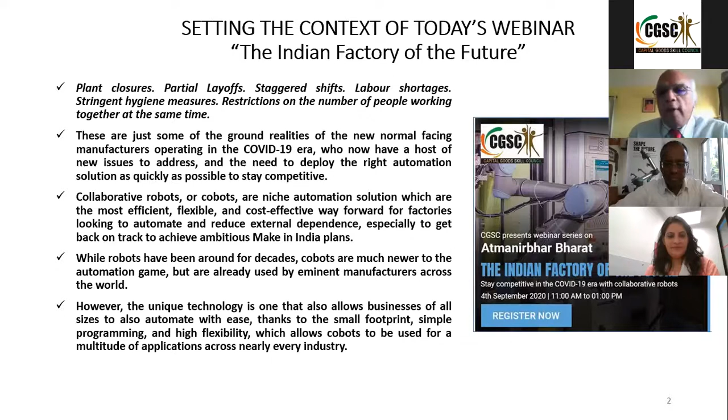Some of the ground realities of the new normal facing manufacturers operating in the COVID-19 era, who now have a host of new issues to address, and the need to deploy the right automation solution—I don't want to say low cost or high cost, but the right cost automation solution—as quickly as possible, to remain competitive and relevant to the market.

I take great pleasure in welcoming today's speaker, Mr. Pradeep David. He is a general manager for South Asia, including India, for Universal Robots. Universal Robots is a Denmark-based company and leading manufacturer of advanced, user-friendly, and lightweight collaborative robot arms, Cobots as we've already called them. He is a highly qualified expert in robotics and industrial automation, with a master's in robotics from Clemson University and an MBA from Marquette University, America.

With over 3 decades of experience, Pradeep has worked with Rockwell Automation in the United States, Singapore, as well as in India. In a short span of time, he has become a name to reckon with, setting up and heading the operations for the South Asian region for Universal Robots.

Before we go into the webinar, I would like to take around 10 minutes to introduce the host of this webinar, Capital Goods Skill Council, where I happen to be the convener of the Industry 4.0 Task Force, and also looking after the Atmanirbhar Bharat webinar series. What is the Capital Goods Sector Skill Council?

It is a council started by the Government of India through National Skill Development Corporation to define and develop national occupational standards, develop quality assurance parameters for assessments and certification of trainees, create programs for training the trainers and training the assessors, and accredit those people on an annual basis, promote academies of excellence for the sector.

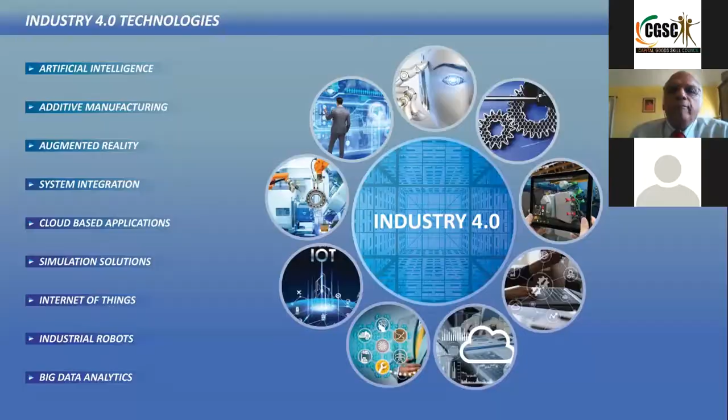Already some of these jobs are listed on Naukri.com, Indeed.com, etc. So please look for jobs in this area. They are highly paid jobs. At least for the next 10 years you can improve your salaries. Even during the COVID era, some of these jobs are very relevant because they are all driven by the internet and the cloud.

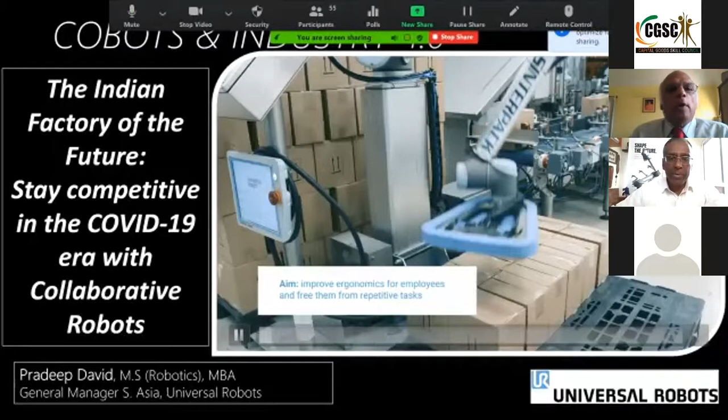So very quickly, I just want to ensure that the screen is visible. Can the video be seen? You're yet to share, sir. Yet to share, okay, hold on. I unshared, so you have to share. Got it, one second. Okay, yes sir, I can see your screen. Excellent, excellent. Now, okay, if you operate - yes, I can see your video also.

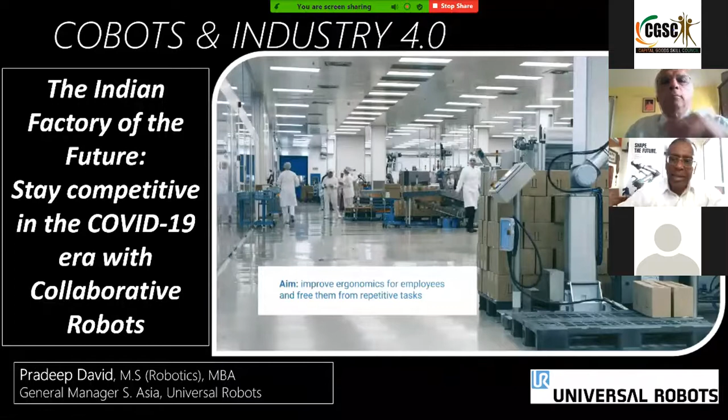Notice the elegance - just one simple pedestal, you mount it on it. There's no fencing around because it's safe to operate next to a human being. Unlike a robot, where robots have been known to kill people, right? We even heard of the accident in Manesar at the Maruti plant, where one of the robot technicians got pinned against the fencing and killed. This can't happen with cobots.

Collaborative robots are safe to operate alongside your operators. You can move them around. In this case, you can see it's just doing a palletizing application, picking boxes, placing them, right? So let's go on this journey of what a collaborative robot is, okay?

So since the COVID era, we do have to start with COVID-related stuff. So let's get that out of the way first. Here are cobots, collaborative robots, being used for various purposes in combating COVID.

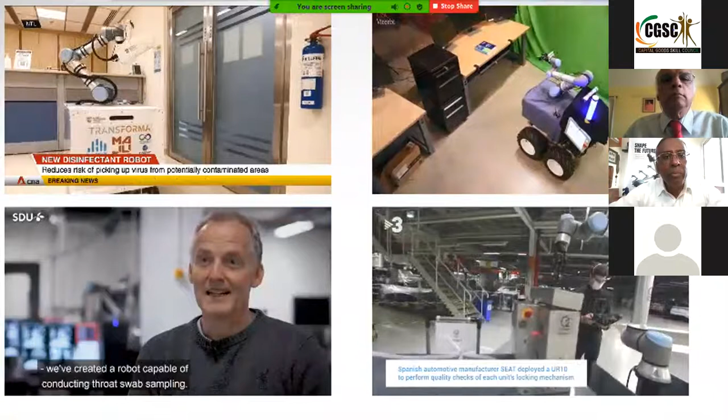On the top left, you see this is in the NTU University in Singapore, where a collaborative robot is mounted on a trolley kind of a thing, and it's dispensing fluid, cleaning the area where, let's say, there was an infection. On the top right, you see that maybe there was a finance person who was operating on this workstation and he got COVID, right? You don't want to send a person in there, so you put a cobot and it's got an ultraviolet wand and it's now sanitizing that location, okay?

So I like to say robots are known for the 3 D's - jobs that are dull, dirty, and dangerous, right? Dull jobs like this spraying. Dirty, where I could get infection. Dangerous, like in this case, for example, it's taking a throat swab of the person.

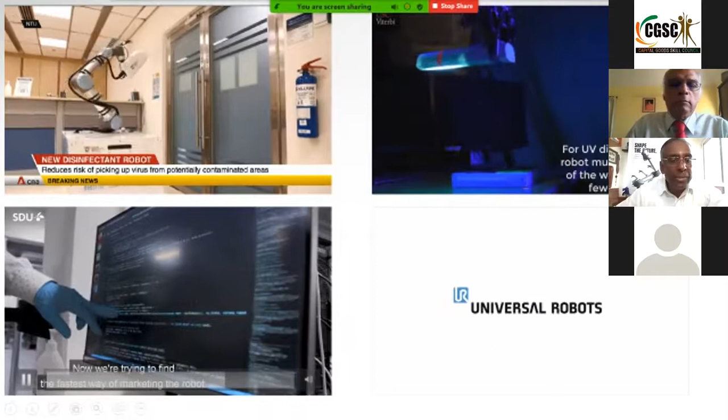So dull, dirty, dangerous is known for robots, but I add 2 more D's to it. Difficult jobs - so we have, for example, loading parts into a leak testing machine at our 2-wheeler companies in the country. Very difficult to do for an operator. A crankcase may have a very difficult shape, and to insert it into the leak testing machine and remove it for 8 hours a day is pretty difficult, okay?

So difficult jobs, and finally jobs where distancing is required. Today, you and I are in the COVID era, we have to abide by government laws, and the government says you need to have 6 feet distancing between people, right? Cobots automatically give you that distancing.

Bottom right, you see a cobot that was used in Spain at one of these automotive companies, I think it was Seat. And Spain had a lot of infections 2 months ago, so they repurposed the cobot, and it is now making respirators there. You can see the first respirators rolled out and everybody's applauding it.

So I hope you get the idea. When you buy a cobot, it's not like a robot that's fixed on one machine doing the same thing over and over again, right? It's really a tool that you can move around based on your requirement. You can even use it as a chef, let's say, to make dosas for you. We'll show you videos of that later on.

So it's that flexible - like you can see, I've got it running in my house. Just brought it in my car, hooked it up to the current, single phase power, programmed it, and it's up and running in a matter of minutes.

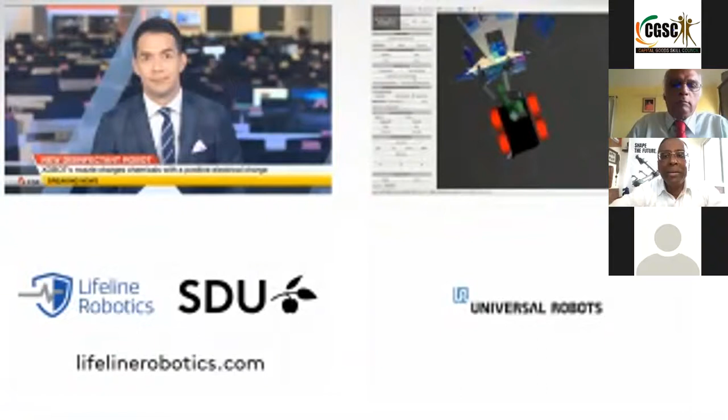So 4 main messages here. Number 1, I already talked about social distancing, right?

Now, women had one issue. They had to tighten 800 bolts a day, and their hands were getting tired, physically very demanding. So they put cobots in. Number 1, it gave them social distancing, 6 feet between people. Number 2, her job is now elevated. She's now able to do quality control instead of brute force work. And it also helps in women empowerment in this case.

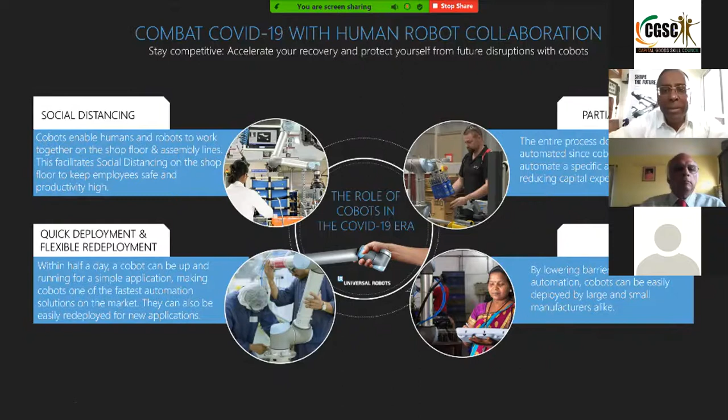So social distancing is one aspect, quick deployment and redeployment is another. Deployment is, I brought this cobot in my car, set it up - that's deployment. But what happens if this is a factory and I've got 20 CNC machines, and operator number 17 on machine 17 didn't show up today? He has COVID or some problem. Am I going to be dependent on that one absent operator and have my entire production line stall? No - I can take a cobot, hook it up on station number 17, and it can now be producing parts for me.

Exactly what you can see L'Oreal in Pune is doing. This was not a machine - this was actually an end-of-line palletizing system. They were able to relocate it from one shampoo line, where demand was low, and move it into another shampoo line in the same shift. Just remove 4 bolts, 2 people carry it and move it there, set it up, and it's ready to go.

So now I'm sure your brains are thinking, wow, with that I can show that my return on investment for a capital goods purchase like this can be very, very compelling. Because I'm not restricted to one application - I can use it in the night shift for one application and in the day shift for another application. So these are the benefits that you have with the cobot.

Democratized automation - I think Mr. Chandramouli pointed this out. We show out here a lady - notice she's not a robot programmer, she's just an operator that works in an SME in Pune. On her machine, we have put a cobot, so we've given her a teach pendant. And she says, 'Oh, I don't know how to do all this stuff.' We asked her, 'Do you know how to do WhatsApp on your phone?' Sure, she can do WhatsApp. Well, then you can also program a collaborative robot. And we showed her how to do that.

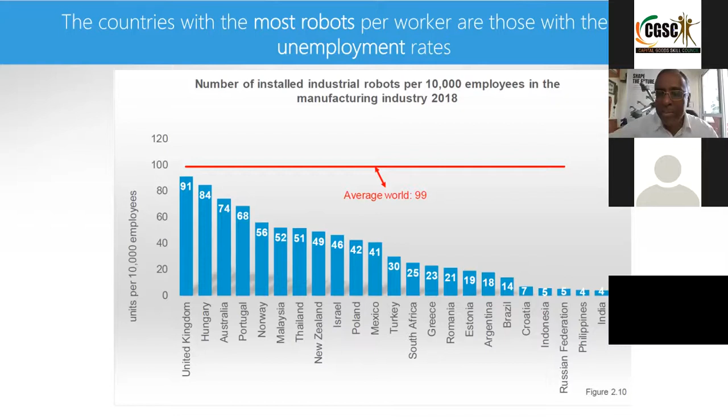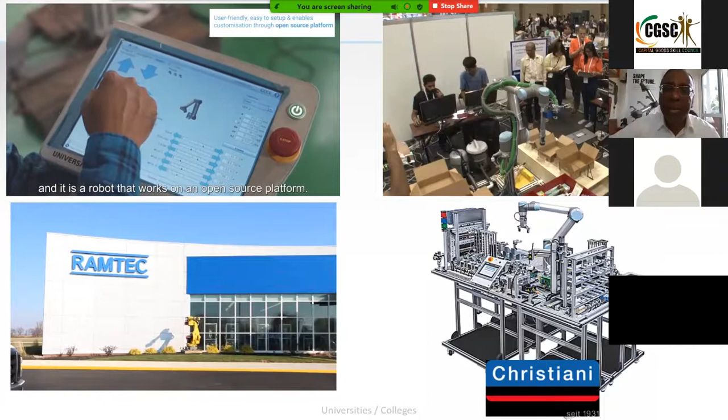This is the professor and head, Dr. Vinod, a good friend of mine, showing how he teaches his students to feel safe doing welding applications. They do a lot of welding there. In fact, they have a PhD program, a person who has done 30 years of welding at BHEL, and he has brought his expertise to PSG College, where they run PhD programs, etc.

You see a student programming it. Notice they're taking it from classroom to classroom on a trolley, so I can move it around from one classroom to the next classroom that needs it, or the next school, or if I've got an MSME presentation, I can use it. Fantastic for universities. Some government official is here too, also looking at cobots, thinking about how do we skill Tamil Nadu. He's coming to see what collaborative robots are doing.

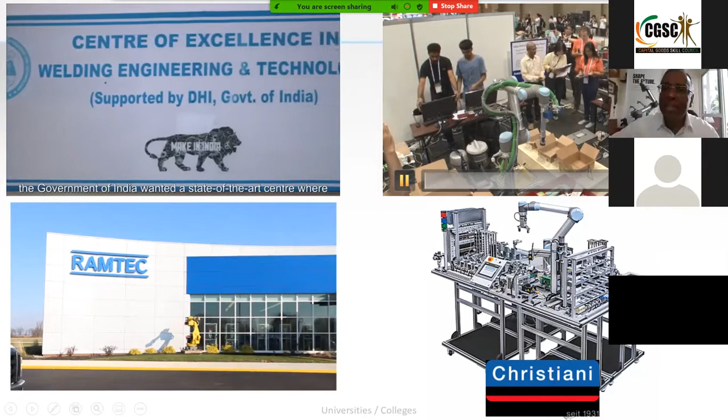On the top right, you see IIT Kanpur doing a pick challenge, an Amazon pick challenge. I don't know what's in this box, SAP gives me an order, I need to go pick up, let's say, a box of Cadbury's chocolates or a bar of Cadbury's chocolates. The robot gets the instruction. Here are the IIT Kanpur students who've programmed it with a vision system. It goes and finds the chocolate or whatever it is, picks it up with a suction gripper, in any orientation, and makes a decision to put it in box number 1, 2, or 3 for shipping.

So you can see while this girl on the left is being taught how to program very easily just by showing the cobot how to do things, the one on the right is being used with high-level programming, with ROS programming and Python programming. So yes, it can be very simple for my uneducated operator to operate, and yes, I can make it pretty complicated and use it to teach Python or ROS with low-level interface to the robots, like IIT Kanpur is doing.

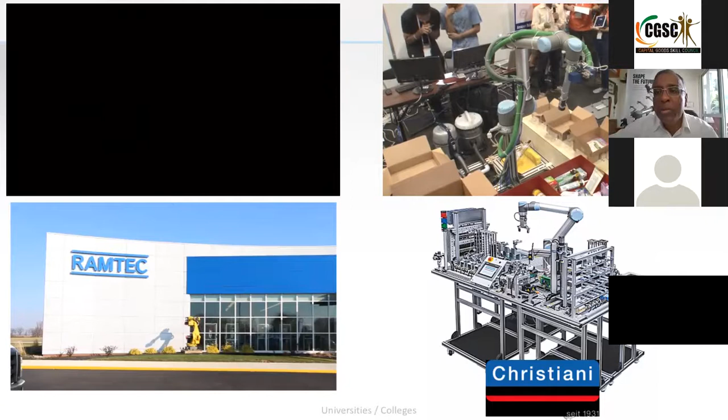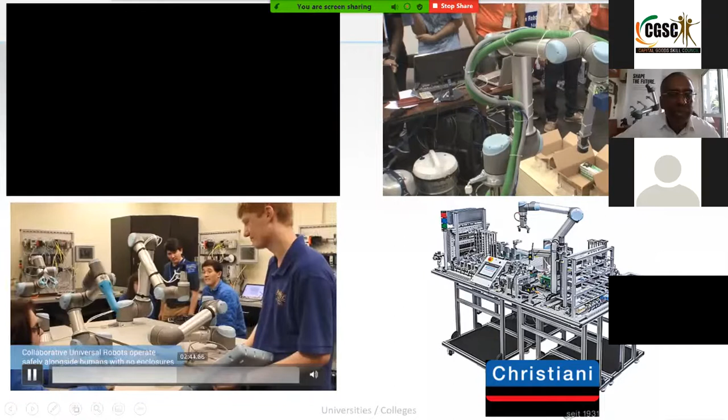Or here's a school in the US, RAMTEC, like a technical school. You can see people coming in for training on cobots. It's a proud legacy of automation, I think this is somewhere in the Chicago area. You can see the instructor teaching using simulation software, and by the way, the simulation software is free. So if you as a university are watching this and want to get started, go to our website, download it today and get started. There's nothing preventing you, there's no cost to getting started. This shows how they're teaching students very safely, multiple students sitting around multiple robots doing various projects, highly affordable.

And then to take it to the next level, Christiani is a company out of Germany, they do training systems. After all, Skill Council, Capital Goods Skill Council, you're not going to be training only on cobots. You're going to be training on Festo, you're going to be training on Siemens.

You're going to be training on pneumatic valves, on hydraulics. They've put a system with everything together, including a Cobot. So if you are in the training profession, if you are in universities, basically you can't do without something like this. You can do PhD programs with it, MSME outreach programs, teach it in your classrooms, move it from classroom to classroom. It's almost a no-brainer, and we have all kinds of customers all over India.

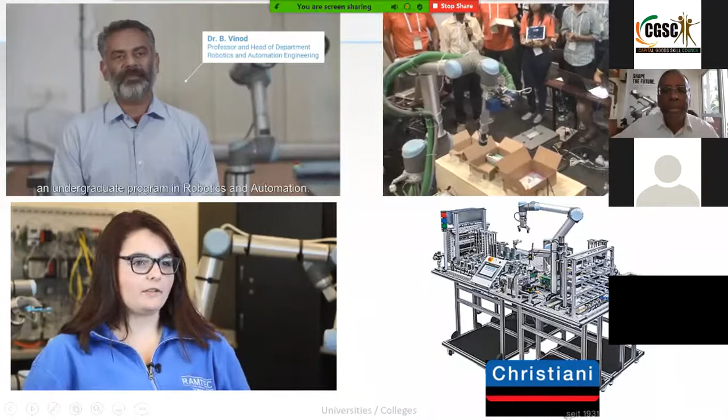I think my next slide shows a couple more universities, VIT in Vellore Institute of Technology on the left, and Manipal Institute, where my son goes, on the right. They've got the Cobot running. Mr. Chandramouli had mentioned that many universities will be attending, students, etc, so I thought I'd share this with you.

So highly affordable for universities. There is an educational discount which allows you to get started pretty easily. Come talk to us. We definitely are interested in skilling India, which means skilling our students, our people who are looking for jobs, getting them to the level where technology is going, the future of manufacturing in Indian factories.

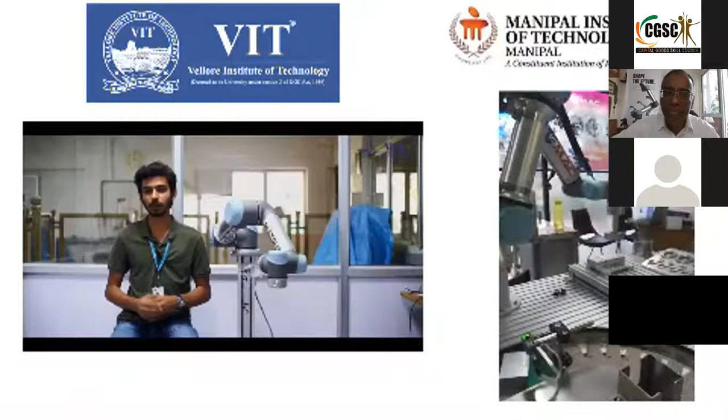Just so that it's not getting too one-sided, let me see, is there any question I can answer at this stage? Is there any question that's come in? Adya, maybe you can come in and tell me if there's any questions that have come in. Or Mr. Chandramouli. Yes, sir.

So one question was, what is the approximate cost of a robot? Fantastic, that's a good question. In fact, Mr. Chandramouli asked me yesterday the same thing. So to get started, basically a small robot, we have different sizes, right? A 3-kilogram robot, then there's a 5-kilogram, then there's a 10-kilogram, and then there's a 16.

So the 3 kg, which is the smallest, can start anywhere around 15 to 16 lakhs, brand new. Now for universities, we can work on something better because, similar to when you go to buy a car, they have demo cars, so we do have some things that we can look for more attractive pricing. But frankly it's not very expensive for the kind of work that you can do with this, starting at 15, but it can go anywhere up to 25 lakhs depending on what you want to do.

I want to put a camera on there, but let me explain a little bit more about what comes with it so that you can understand. There is nothing else you need to buy other than this system. It comes with the PLC, it comes with the IO, it comes with all the industry 4.0 connections, which means TCP/IP, Ethernet IP, Modbus TCP/IP, everything comes free of cost with it. Safety IO, and I'm sure I'm missing a bunch of other things, analog IO, digital IO, all that comes with the collaborative robot itself, a full control system, standalone.

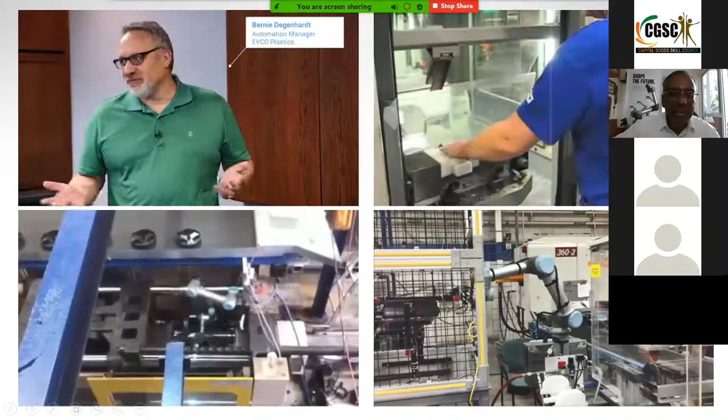You can see these are injection molding machines where the cobot is being used for a simple pick and place application. I'll let you view the injection molding machine—this is a robot mounted on top. You can see it's loading and unloading parts, and there's a conveyor going. So there was another question on whether cobots can be used for CNC machine tending.

The answer is yes, but the second part of the question is: how do we get it ready to operate, and what's the budget and operations idea? Good question—does it work with CNC machines, what would it cost, and how would it look? I think you've preceded me by two slides, so whoever asked that, give me a minute, I'm coming to that answer. It's in my slide.

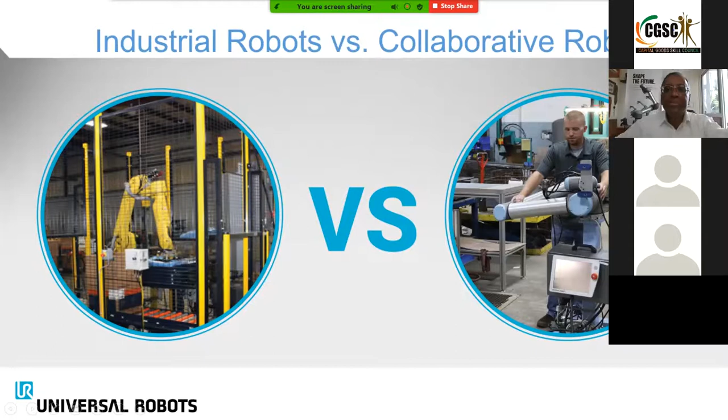Technically, there's a specification called ISO TS 15066. I won't bore you with this—if you're interested, just go to the internet and download it. This is the specification that ISO has come out with, which allows humans and robots to work together. It's a full one-day class to understand, so I won't spend too much time. There are many other certifications too, like TUV Nord.

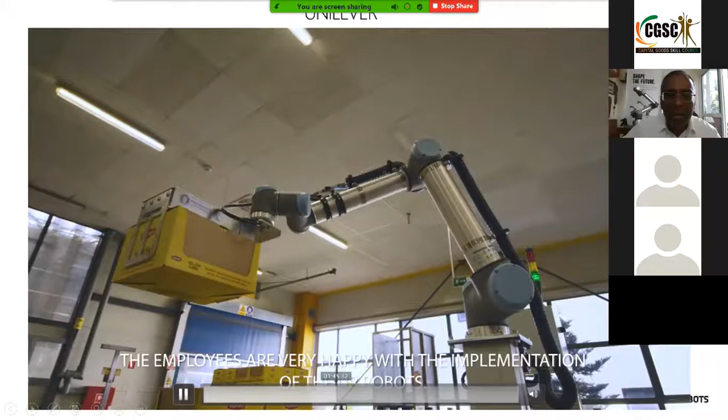Very, very simple. I think they bought six of them in this particular example. Let me show you—this is what the teach pendant looks like.

This is interesting—notice it's putting a box somewhere in a pallet. Now I want to program it. Let's say I've got an uneducated person who needs to program this. Take a look at what this guy does.

Notice the operator is holding the cobot by hand with the box, saying 'I want you to place it here,' then he hits the enter button and it remembers and repeats the motion. That's how much of a programmer you need to be. You can actually take unskilled labor with no education, show them how to hold the robot and move it to the location you want, and it will do that.

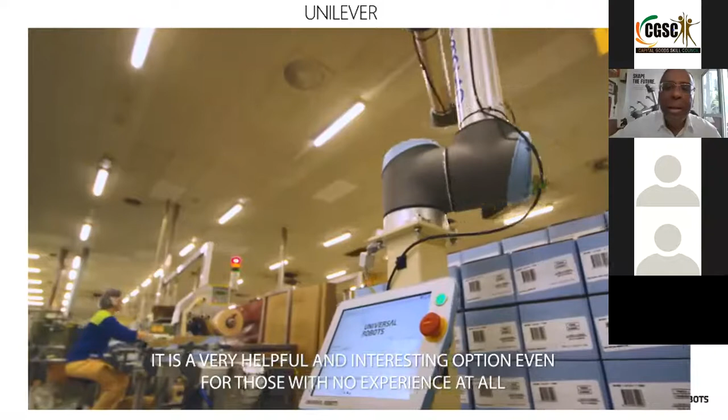That may look like no skills are required, but that's not true—because for higher value-add tasks, like the bin picking application IIT Kanpur did, you can't do it with that simple method of programming I just described.

Now you have to get into software. You have to get into Python programming. You have to get into ROS, which means robot operating system, wherein I send low-level commands to control every joint the way I want to. Okay, that can be done, but you need to be a bit of a programmer to do that.

So I hope you're getting the concept. While we say it's easy to program, to become an expert in this you really need to get some skills. You need Python programming skills, some PLC skills for interfacing signals, and some mechanical engineering skills, because how you design your gripper is very important. That can make or break your project.

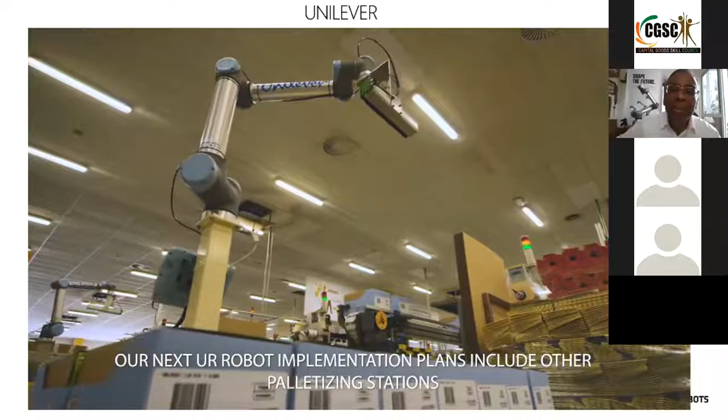Or in this case, he's got a camera sitting on top of the cobot. So how do I interface the camera to the robot? Now it becomes a little higher skill level. So I hope I made that clear. While I talk about low skills required to run it, you need really high skills to do efficient programming of a cobot. Now, the question that someone in the audience just asked, how do I do this on a CNC machine?

Let's take a look at a CNC machine project. This is happening all over India, where people say, I'm not able to fill my night shift, nobody wants to work at night. So they put a little input template, and the bar stock is loaded in these holes. The robot picks up the bar stock and does automatic gauging, the length check and diameter check and whatever else it needs to do.

It picks up the part and now it's waiting. Notice there are two grippers on the robot. Now it's waiting for the finished part, goes in, picks out the machined part, all automatic. Notice there's no human being around, and it loads, indexes and loads the bar stock, the raw material. It comes out, the door closes, it hits the start button automatically of the CNC machine and it's off and running. Now it deposits the machined part in the output tray.

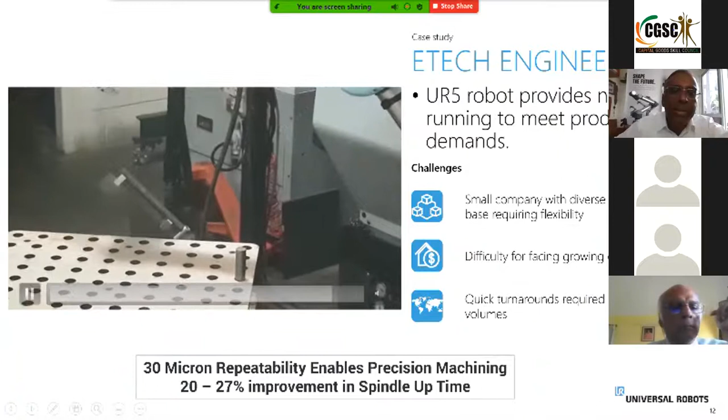Do you see how this can work for you? If you have a machine shop, just to get something like this inserted, we can probably come in two weeks and get this project done for you. Many of our distributors have a collaborative robot on their shelf, we just need to put a pedestal like this. You need to provide us some form of input, such that the input bar stock, maybe it's a conveyor belt, a gravity feed chute, whatever it is. In this case they put it in a little feeder system, let's say. So as long as you can give us the input and the output, where do I need to put it.

For us to do this job, by the time you place the order, get it in your system, and get it running, I guarantee you in two weeks we can have this running. So hopefully that answers your question of how long will it take.

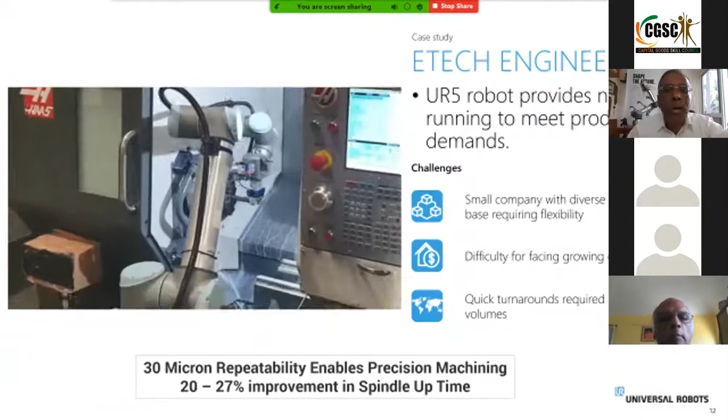Many SMEs have problems with payments. So these people are actually printing money because they could not run a third shift, and today they're getting production out of third shift. So if you need financial plans that you can pay out of the profits you're gaining by putting in a cobot, talk to us. We have connections with people like Siemens Finance that can help finance your project. So you actually see no cash down, no negative cash flow, and yet you're future-proofing your company.

I have SME customers, for example, doing this job for multinational company clients like Bosch. And Bosch has told them, look, if you do not automate your plant next year, don't expect me to increase your orders in any way. In fact, I'm going to start reducing. So there's a lot of pressure on SMEs to jump on the Industry 4.0 bandwagon.

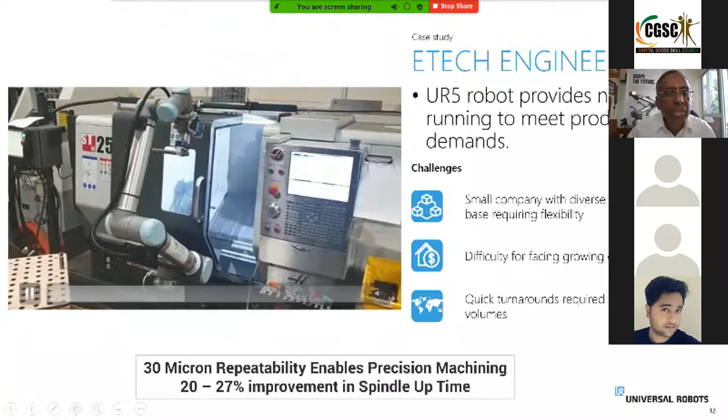So for a small investment like this, let's say 20 lakhs, you can put a UR5 cobot in there with some grippers, do a little jugaad to make sure I have an input and output tray, and I can show my client I've got a cobot. I'm Industry 4.0 compliant now. I've got much better quality and productivity. You want me to run through the night shift? I can do that.

So these are the benefits that are so powerful that I'm going to share some stories on how some SMEs have seen this value. And once again, it's not the cash, it's not the upfront cost that's going to deter you. It's, are you ready to start? That's the important thing. Are you willing to take the plunge to get started?

Let me give you an example of one company, a small SME, that has done this in Gujarat. Let's take a look at this video.

Oh sorry, I've turned the volume off.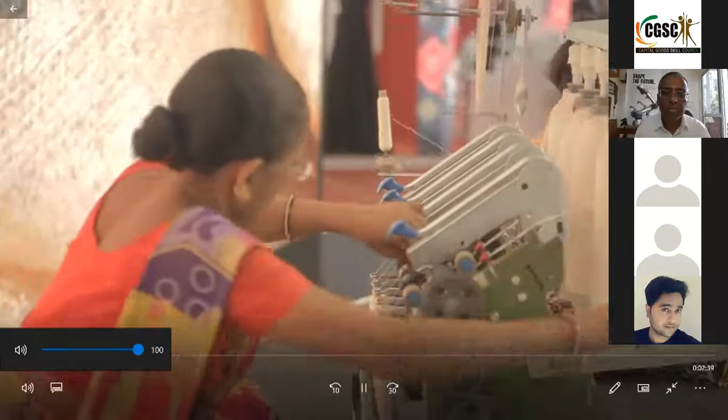I am Ashish Nagarshet, managing director with SMEW Textile Machinery Private Limited. We are a textile machine manufacturer based in Ahmedabad, India. SMEW was started in 1958 and it's been our family business since then. We make textile winding machines. Our main product is the soft package winding machine, the rewinding machine, and some customized machines for winding as well. We've gone from MSME to SME, a small and medium scale enterprise, from a micro scale enterprise.

In January 2017, SMEW Machinery decided to purchase and deploy the UR10 Cobot by Universal Robots. A universal robot with its simplicity and non-fencing requirement met our requirements specifically for this machine. The UR10 robot is basically being used for a pick and place application, so our operators find it very easy to use. It's on a different level as far as operator friendliness is concerned.

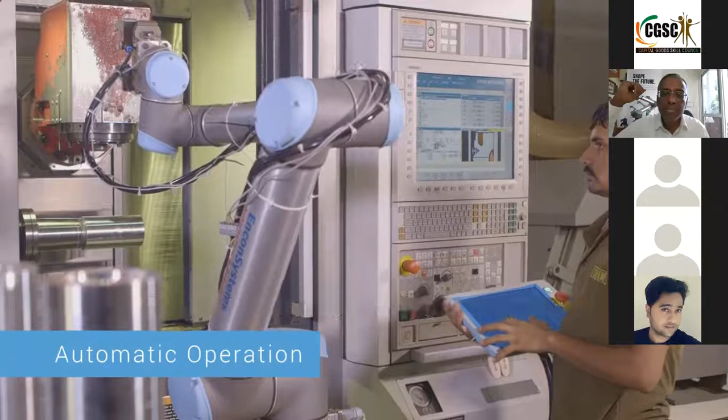The safety features were the most important part. The second important fact was the UR10 robot has a 360-degree movement in all directions, which a normal industrial robot would not have, and that was one of the reasons it could move in a very constrained space.

The advantage with this application for us is that we are able to run the machine for much longer hours than we would using human labor. Before the robot was installed, we were making about 30 pieces a week. Now we are able to go from 30 pieces to almost 80 to 90 pieces per week, a jump of almost 3 times. It's been very good for us because the return on investment is less than 12 months.

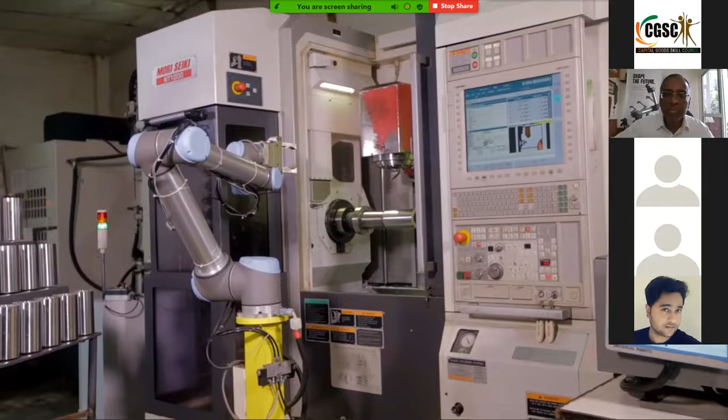We hope to have a long-term relationship with Universal Robots. We look forward to investing in more robots in the future and working along with the robots together. Just like Ashish at SMEW Machinery, many more small and medium-scale enterprises are choosing Universal Robots Cobots as an affordable solution to take their operations to the next big milestone.

I hope after this seminar we will have more satisfied MSME owners like Ashish.

Adya, any questions came in? Yes, I think Mr. Chandramouli is back, so he might ask you some. Okay, Mr. Chandramouli, any questions that you feel would be appropriate at this time?

Maybe he dropped again, but one question was: are cobots only suitable for pick and place applications, or are there other applications? Specifically about welding, if they're suitable for welding. Good, both of those are addressed - very good questions about what other applications, like welding, they can do. Please hold on for a few slides because I've got a slide addressing exactly that, I'll come to that in just a minute.

Good question. Yeah, actually, can you hear me? Yes, Mr. Chandramouli, go ahead. No, I'm Chaitanya here, I'm not Chandramouli. Okay yes yes, and you're from CommScope, Goa.

Is your cobot having 6 axis or anything less than that? All 6 axis - I'm sorry, I didn't clarify that. These are only 6 axis robots, basically articulated arms are what we call them, and yes it comes with 6 axes only. There's no 4-axis or 2-axis or 3-axis.

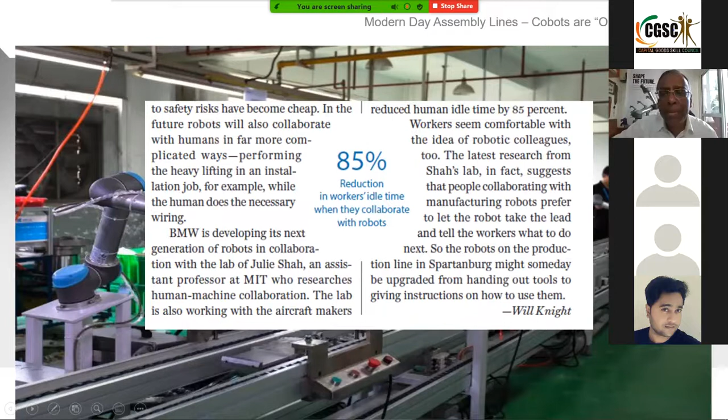Automatic social distancing—there's more than 6 feet between these two guys, no problem with COVID. But that's not the reason they put it in. The reason they put the Cobot and a human together in an assembly line is there's an MIT study, Massachusetts Institute of Technology, which specifies that when humans and robots work together, there's an 85% reduction in idle time. That's a huge, massive reduction, which consequently increases your productivity and quality.

Again, we have documented that very diligently. But like I said, this is not a marketing spiel, this is a study done by MIT. This is an example of a company making this, called Xiamen Runner.

I'll turn off the volume because some of it's in Chinese. They make these faucets and different things for your bathroom, taps and fixtures and those kinds of things. A lot of assembly—you have to put washers, put a handle, screw things together, shower caps, all that.

You can see the complex application Cobots are used for in assembly, where you have many little parts to be put together. Typically in an assembly line, I have people working shoulder to shoulder, and that's a huge problem today with COVID—I have to put 6 feet distance between them.

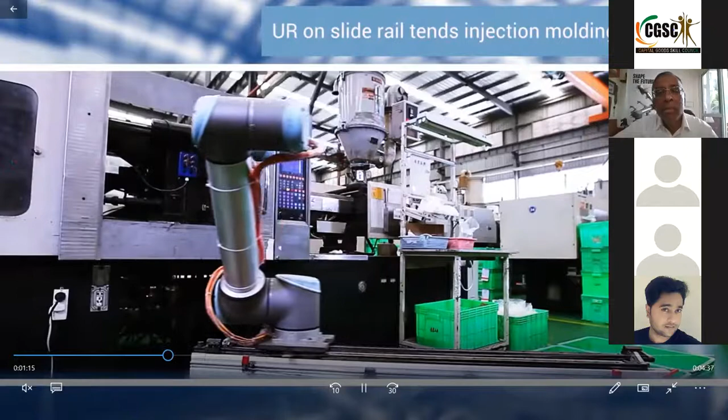So this is where a Cobot is extremely beneficial. Not only does it give you social distancing, it also acts like a pace setter. If the operator goes for a coffee break or a chai break and his input buffer starts building up, his supervisor is going to be on his tail pretty soon—hey, what's going on here, the robot's doing its job, you're not doing yours, and you're holding up the line.

This is what helps with idle time reduction and productivity improvement. So hopefully you're seeing what's on the screen—you can see it's a complex assembly part, being assembled completely by Cobots, taking it out from a machine, with human and robot working together.

Here it's taking it out of a machine and then taking it for a different application. The human being is doing something there. What I talked about—partial automation, humans and robots working together.

Okay, I'll take you a little forward here. It's dropping the faucet handle. I'll just go a little forward and you can see now.

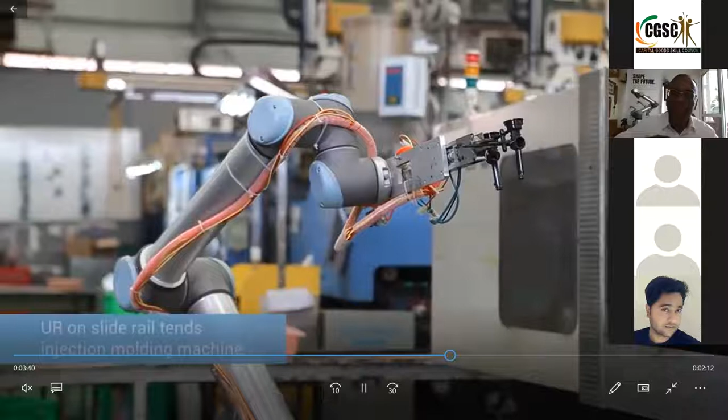Notice it's on a 7th axis. So while the machines may be far away, I'm moving the Cobot in real time from machine to machine, just by putting a slide in between. These people didn't want to change the layout of their factory, so they said, I can't put two machines close together because of the robot, but I'll put a slide like this and it can handle this machine and that machine.

So that's an example. Here's an example of how he's putting parts, and the robot is taking the parts from the turntable and loading it into the furnace there.

Okay, now you can see here, this is not a robot programmer. He's just an operator, and he is now moving a robot, putting 4 bolts in position. This company bought 60 collaborative robots in one shot to do this assembly application. This is how they can turn out millions of faucets and be very competitive. By the way, they've not lost any labor for that, they've actually doubled and tripled the size of their factory because of this.

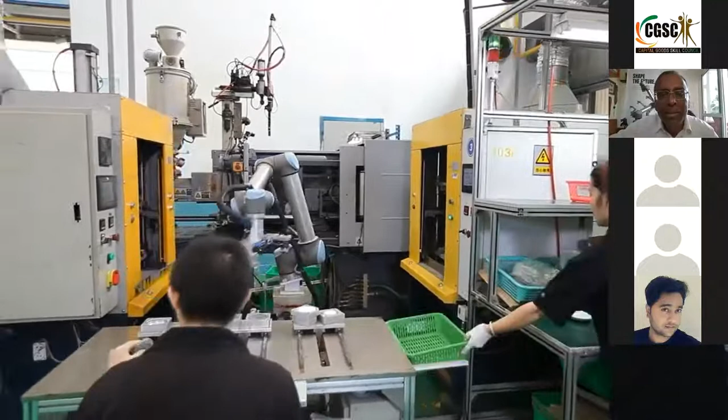Notice now, if the robot accidentally hits the operator, it doesn't kill him, it just stops. In Chinese it's saying here, protective stop, and you just hit restart and it starts from that location. It's just demonstrating how safe a collaborative robot is to work with your operator, so you don't need to worry about their safety.

Every axis is designed from the ground up to be very... notice how he's programming it by moving it to a location and saying, I need you to pick up a part from here. Now he's filling up there, it's coming and hitting him by accident and stops. He just hits the reset button here and it starts from that same location. All right, so that was assembly.

Hopefully that's answering some of your questions, what all can cobots do. I think I've talked about this, it's very easy to maintain, you can self-maintain it. There's no oil to change, no grease to change. It's easy to program, unless you get into the high-level programming, which requires Python code and skill set development.

Every axis will move plus or minus 360 degrees. You can move it from machine to machine. I can mount it on the ceiling, I can mount it on the machine, I can mount it on a pedestal. Very low power consumption, etc.

And by the way, it's not easy - that's why it was only introduced in 2016, this ISO standard which allows robots and humans to work together. There's 65 patents built into this for a human being and a robot to work safely together. And by the way, we've deployed 46,000 of these cobots now around the world.

And here are some examples you can see of what applications cobots are doing. On one page, I can see it's doing screw driving. On the top left, you notice it's the Bajaj Pulsar bike. I don't know if you saw it at the back, those bikes are standing there, the Kawasaki or whatever, Pulsar anyway. It's doing the screw driving application, automatic screw driving.

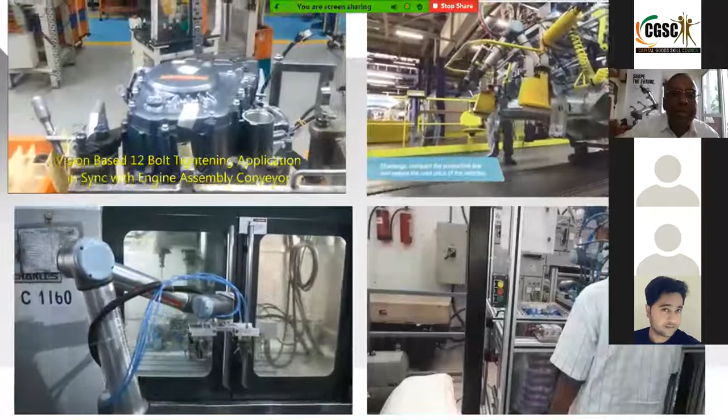Here also it's doing nut running. There's a camera, it's looking at the engine block and saying, oh, it's got 12 bolts. Now it's taking the nut runner and tightening that bolt, and the Newton meters is exactly right. The nut runner is then feeding it back to an SAP system against the VIN number of that chassis, of that engine, and your quality is therefore maintained.

Once again, 6 feet distance between this girl here and the girl on the left, or more - automatic social distancing provided by cobots. Also helped with Mr. Rahul Bajaj's vision of 50% women on his shop floor.

Top right, I can see this is in France, Peugeot. Notice the cobot is mounted and goes under the belly of the car and it's doing the nut running. It's a very difficult operation - a human being had to be under the ground for 8 hours a day. Very simply, he's put a cobot in there and it's doing the job. You can see here, it's a patented application by them, by the way, and there you go, it's doing the nut running.

Bottom left, we've talked about Bajaj, we've talked about Peugeot. Now you can see an MSME on the left - look at his shop floor, looks like any MSME, right, because it's in some Chakan, some industrial park. He's got 10 machines and he's got a cobot there. So he had to make a decision: do I want to put another machine, a CNC machine, or do I put a cobot?

He says, well, my problem is not machines, my problem is labor. I'm going to put a cobot in such that whether labor comes or not, I'm able to make my parts, maintain the quality that the customer requires, and maintain my productivity. So here's a machine shop owner that has made that decision of putting cobots in - he's only got 10 machines, but he's put a cobot in.

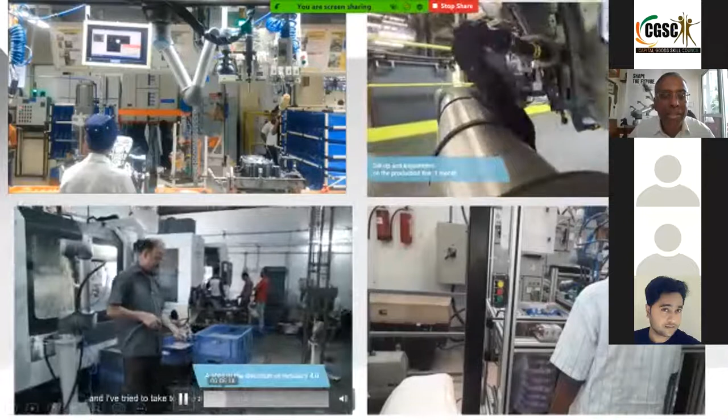Bottom right, this is in Chennai, Udayam Dal. They make dal packets. This lady used to carry these dal packets and put them in a sack. Today the robot is doing the heavy lifting. All she's doing now is dragging out the sack ready for shipment, and she puts in a new plastic bag. Very safe to operate next to it. In case it accidentally hits her, it just stops, no harm done.

So like I said, this is not a big company like Unilever. This is a small dal company, Udayam Dal. Notice the background, it's just an SME. So if you're an SME, understand you can afford this technology. There are ways you can finance this. It's only the desire to get started - yes, I want to get on the Industry 4.0 bandwagon, I want to have the latest technology, 50 disruptive technologies. We call it the big equalizer. So you could be a Bajaj or a Tata, or you could be an SME - cobots are for you.

And here's more examples of SMEs - New Engineering Works. This guy makes aircraft parts in Pune. This guy is doing some kind of painting applications. So you can see a quick video on that.

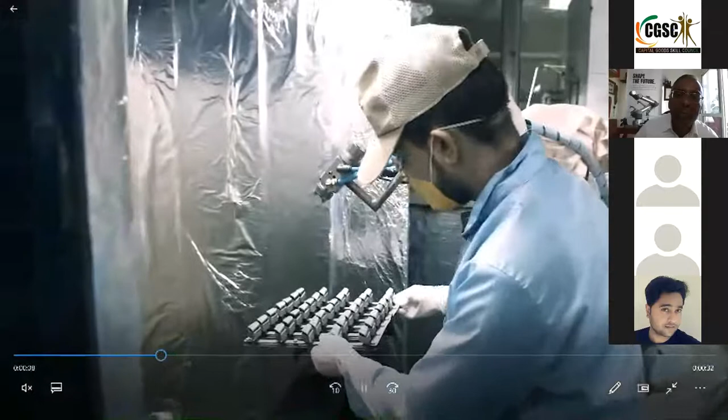He used to do the painting, and the quality was very bad when it was done manually, because you have to do exactly 8 coats of paint. Today the painter himself is training the cobot how to paint - he's not a robot programmer. Now the cobot will start, it needs to do 8 coats, and it can count exactly to 8. What the manual operator was doing on the left-hand side, it could be 8, it could be 10, it could be 6 coats, because after 6 or 8 hours he's tired. He's a human being, he gets a phone call and gets distracted, and that gets rejected because of the quality - the laser etching doesn't happen properly.

So he's talking about this, the SME owner - maybe you can listen to him. He talks about how difficult it is to get labor that's reliable.

I put this universal robot into production, it's hardly 2 months, and what we have observed is we are getting a better quality product. The rate of rejections or rework have reduced drastically, and furthermore we intend to increase the productivity also. What we were doing, let's say X quantity previously with manual interface, now we are doing X plus 2 with the robot even running at 50% of the speed. So in a couple of months time we'll increase the speed, and then of course we'll go almost 1.5 times what we were getting previously with the human interface.

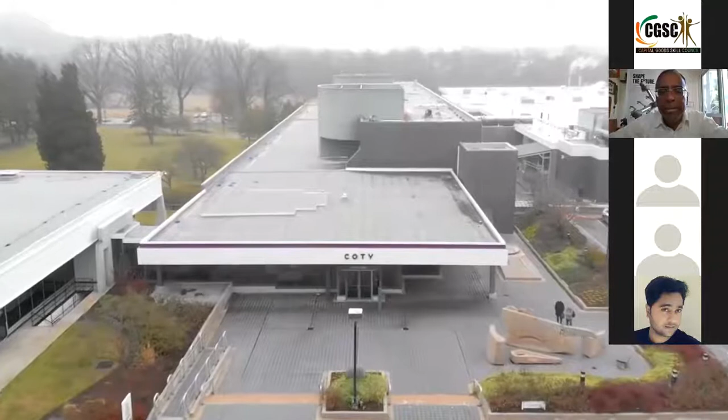They make nail polish and those kind of things, Coty. And they have about 12 presses that they had to handle, so they would have had to buy 24 robots for this. But instead, they bought 4 robots.

These 2 robots, UR3 and UR5, are on a cart. They move the cart to the location that it's needed, onto the press, and then it's working. Based on demand, I can move my cobots to where it's needed. So job shops which don't have continuous production get a lot of benefit from this. Today I got a big order there, I deploy my cobots there. Day after, the order's in the other building, I can just take the cobots and deploy them at the other building. You can never do that with robots, but cobots allow you to do this.

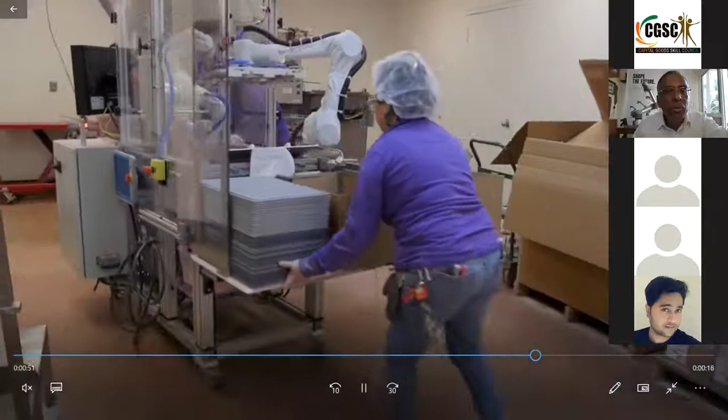Once again, you'll see here in a minute. They bring the cart to the machine with the 2 robots on it, the UR3 and the UR5, a 3 kg robot and a 5 kg robot. Then they locate the cart on the ground, there's the locating pin. Once they put the locating pin, it goes about doing what it has to do.

He's talking about how he could never have afforded this project. This is the engineer who did the job. Trust me, all he's saying is that he could not afford this project, but since he can move the robots around, it became affordable and he did the project.

The plant manager is very happy with this. There are 10 Dell plants around the world, and what he has done in Chennai, people are replicating. It's a very proud thing that somebody is doing it in India and they're replicating it.

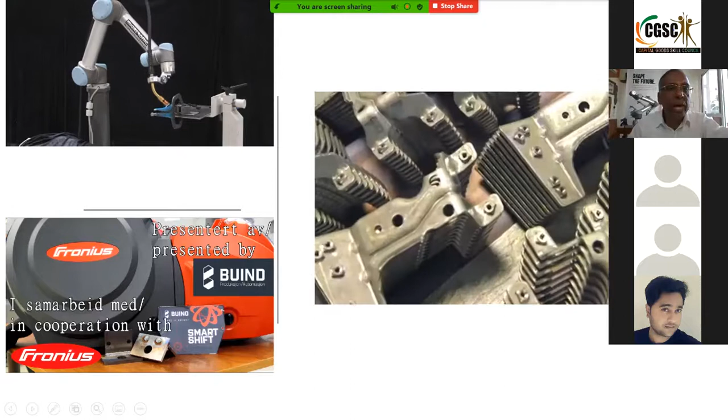On the top left is an arc welding example, how the Cobot is being used for arc welding by one of our partners, Megatronic.

Bottom left, this is with Fronius. We're actually doing some kind of an assembly application. So let's say you needed to do assembly and welding of parts right through the night, unattended.

Notice a tool is being changed. The part is now being picked up, whatever that part is. And then maybe the assembly requires screwing and drilling in one location and welding in another. So it's taking the part, putting it in a fixture where a certain application is happening.

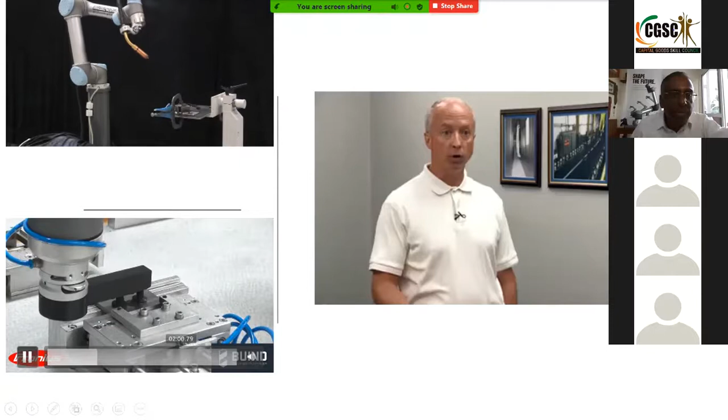Now it's taking another part with a suction gripper, putting it in the other fixture, clamping, and then now it will go change its tooling and pick up the Fronius, the welding gun.

So MIG welding, TIG welding, resistance welding is another common one. Bottom right, you can see Universal Robots does a 40% efficiency increase in welding application. This is resistive welding that they're doing on the right-hand side.

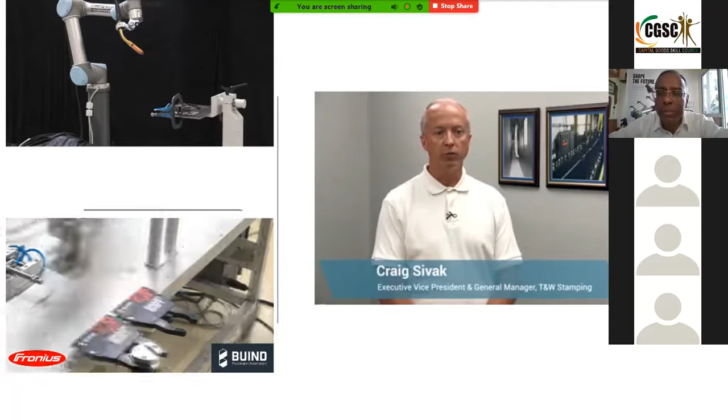If you're interested in this, there are about 100 videos on welding. Just type in Universal Robots welding on YouTube and the videos will show up. All these videos I'm showing are available in the public domain - just type in Universal Robots SME in India, let's say, and you'll find it on YouTube. So that's resistive welding on the top right - different types of welding, and there are many, many more.

So CNC machine tending - here's an example. Now I know Mr. Chandramouli is very fond of Fanuc, so I'm showing some robo drill machines here, where the cycle time is very low, and a collaborative robot has been put on rails, and it is actually loading and unloading maybe 16 machines or 8 machines per row. Just one cobot is doing the loading and unloading of the entire line.

There are different types of many examples of machine tending that I've got, but in the interest of time, I'm just going to move on. And I want to show you this video.

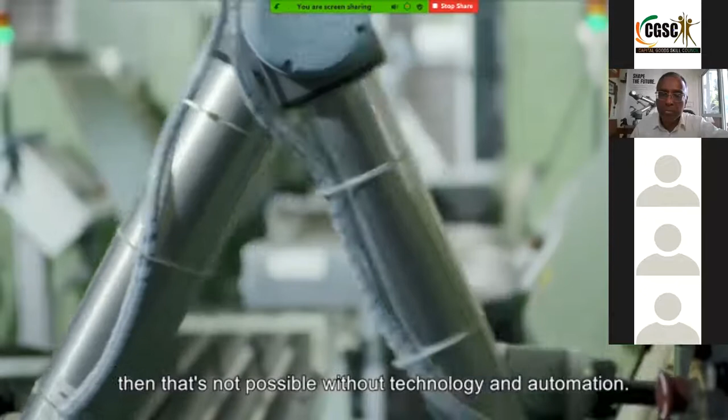So I think that's probably the best example of a SME in India making use of this technology. Increased capacity, quality, throughput, 24/7 operations, small footprint, and in some cases payback in less than 1 year. In the SME case, you saw that low volume, high mix production environments are supported. So these are some of the business benefits.

You're empowering your worker. You're not just reducing your worker to simple pick and place, you're making him a cobot operator. He's learning higher skills. So these are all the benefits that come out of a decision like this.

Here's a quick calculation that the New Engineering Works people shared with us, that they were running the machine 3 shifts, times 10,000 rupees per employee, times 12 months, with 10% increase every year. So if they had continued with the way they were going, their cost for that machine would have been 10 lakhs, 11 lakhs, and 13 lakhs in year 1, year 2, year 3.

But since their job was 30 lakhs, and 30 lakhs they borrowed, they had to pay 15% interest, so every year they were paying 4,50,000. Including the depreciation expense of 4,50,000, that sum is 9 lakhs. So with labor, they were paying 10 lakhs, with the robotic system they're paying 9 lakhs, so there's a positive cash flow from year 1.

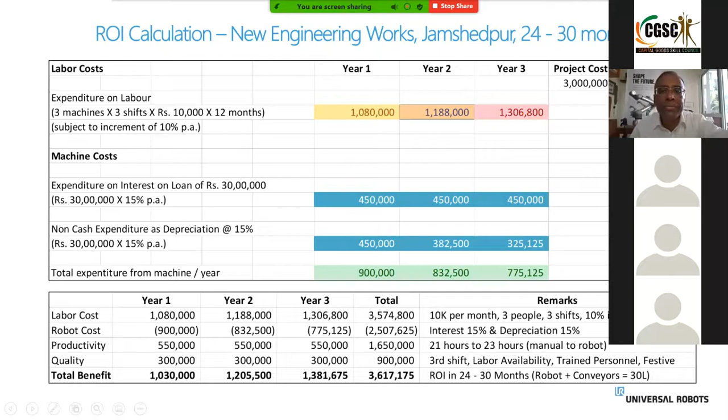Their investment was 30 lakhs. So this was the calculation that this company shared with us, where they put in 1 cobot, and immediately after that they continued with 6 more cobots. They're making parts for commercial vehicles.

One of our partners is BFW. They make these turning machines etc. Here's an example of what they've done for one of their customers. They've made this little mounting station for the input parts, and they've got 2 grippers, so they're loading and unloading automatically. They've built this little device for turning, automatic parts loading and unloading.

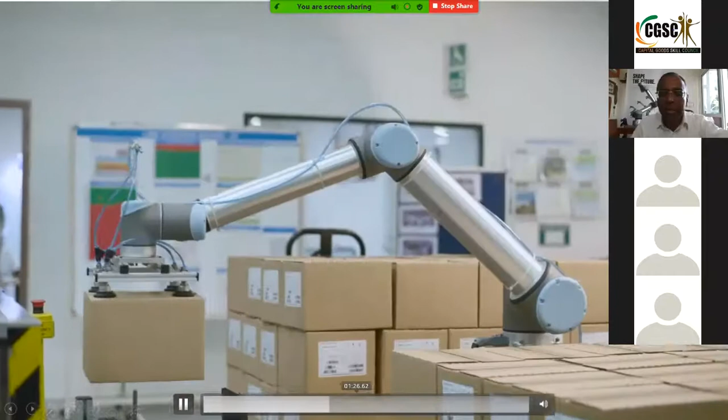Here's an example in L'Oreal. I'm maybe running out of time so I won't go through this in detail, but we did our ergonomic risk analysis and found that this is a job done at L'Oreal in Pune, which I've already talked about. It's doing the palletizing, putting boxes on a pallet.

You can see the operators actually manually picking up the robot and moving it to a different line, just taking out the screws. This is a UR10, so 2 to 3 people are required, and they just carry it to the other location and set it up there.

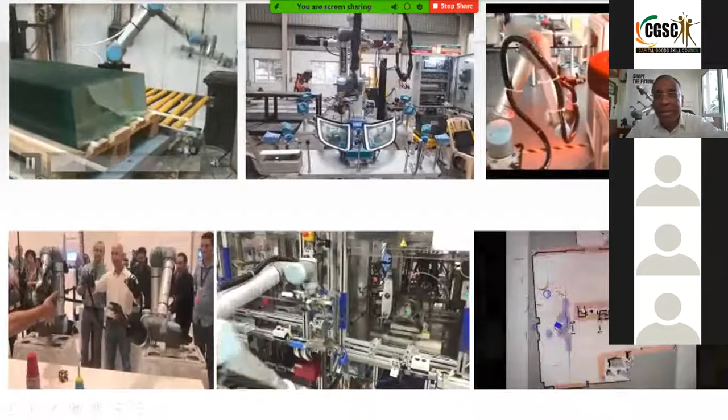Again, in the interest of time, I'll take you to one which shows many different applications in one screen. Top left, you can see it's handling glass, so a cobot can be that delicate. Dispensing application where glue is being dispensed for the windshield before it's fit onto, in this case, a Ford vehicle. Inspection, where a camera hooked to the cobot is now looking at the sidewall, looking at the treads.

Bottom left, Mr. Jeff Bezos, richest man in the world, with haptic gloves, controlling the robot remotely, just to show how this technology can work. So it's very big in R&D type projects. Let's say I'm handling a COVID patient and I want to do it from a remote location. That's one example, right?

Middle bottom is Bosch, etc. And bottom right, as you can see, it's Airbus. Airbus is the customer. They put a cobot on an AGV with a hopper of screws, and it's doing the automatic screwing on the wings of an aircraft, Airbus 380 or something like that. So that's in the R&D center of Airbus.

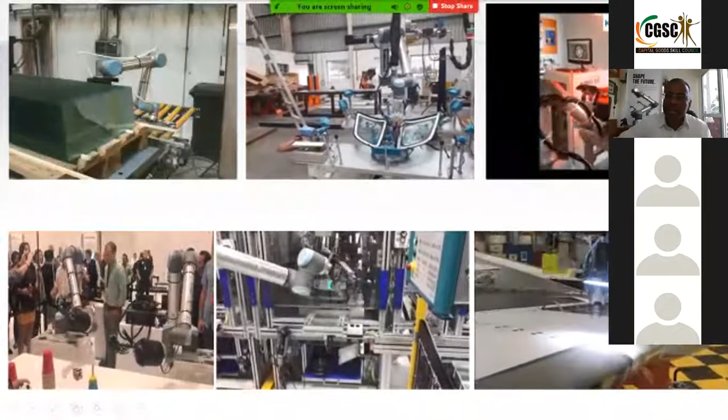Many more examples, but in the interest of time, here's an interesting one where the steam ironing is being done by the cobot, but the folding, which is difficult to do, a robot is not able to do, is being done by human beings. So 4 different shirts are being ironed by the cobot in turn, whereas the folding application is done by human beings. Polishing, bottom left, you can see automatic polishing.

A lot of labor is used for polishing in India. China has automated this completely with cobots. We're slowly starting here in India with buffing applications, etc.

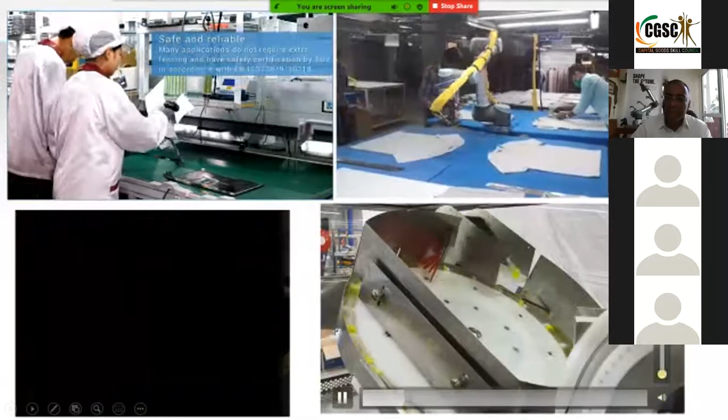Nowadays with COVID and vial handling and automatic filling of prescriptions, you can see an OEM machine being developed. There are 2 cobots, one holding the vial in place, and whatever is dispensing fills it, measures it, and the other cobot picks it up and takes it to the capping station and shipping. So 2 cobots working in tandem, connected through Ethernet, right? So they can work hand in hand with each other.

Oh, another assembly application, I would say.

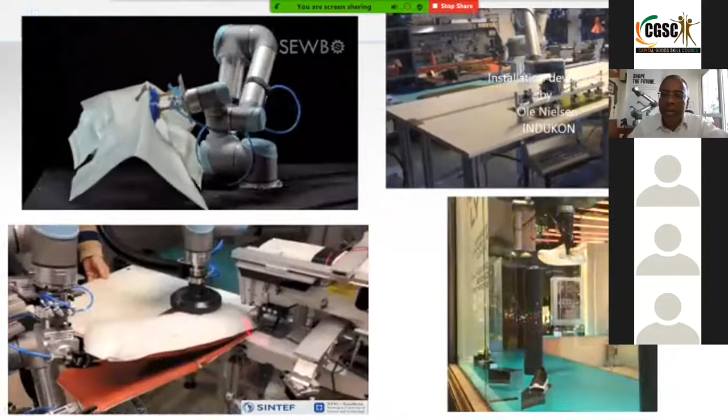Textiles - many different examples in textiles that you can see here. Bottom right is not textiles, it's actually a retail application where they're using a cobot to demonstrate shoes in the window of a retail store. Top left, you can see it's making t-shirts - the cobot is taking the cloth and automatically the stitching is happening. So people in Bangladesh and Sri Lanka are very interested in applications like this, right?

Bottom left, I think it's putting 4 sections together - the cobot is doing that for stools. So much research is going on in all these textile applications. I just want to give you a sampling, just so you have an idea. This is by no means detailed.

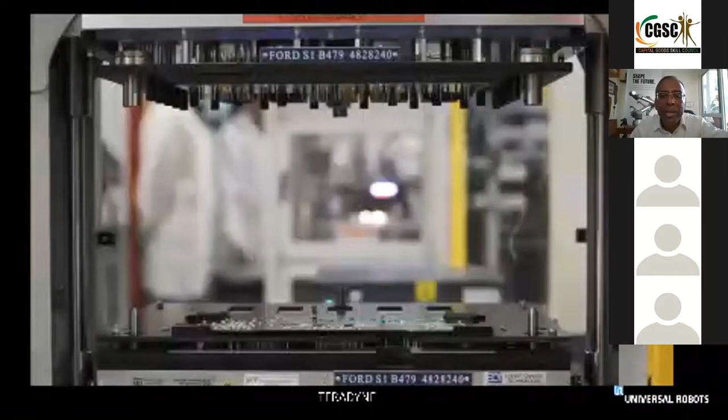If you have electronics, our own mother company here shows many examples of loading and unloading electronic boards, single boards, for testing applications - somebody mentioned they were interested in inspection. So picking up PCBs, loading them into a testing machine, unloading when it's done. It's all unnecessary work which labor does today, right? But there's no value add to it - it can easily be done by a machine. Use labor for higher quality, higher value add stuff.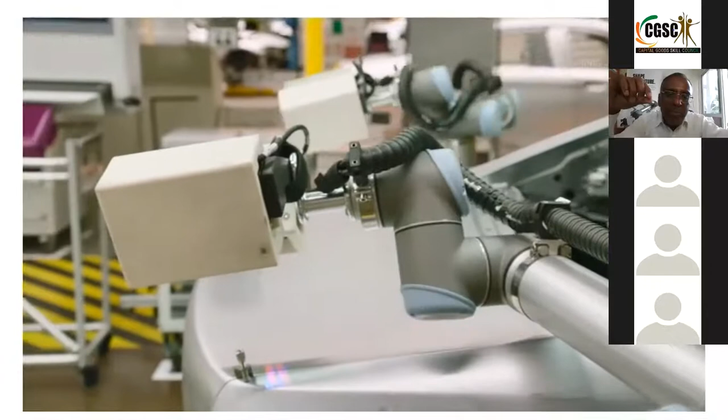There are 4 robots, one on each side of the car, front and back. Everything shows green. If one of them is orange or red, it goes into rework. Here's a typical example - an Indian car company in Delhi is using this for final inspection. When the car rolls out of the assembly line, they've got 2 robots with 2 cameras doing about 128 checks: Is the radiator cap on? Is this tightened? Is that in place? Is the dipstick there? All that is done before it's released.

This is R&D facilities, very popular with people like TCS and universities, because they're doing R&D and showing how their Industry 4.0 labs are being used around the world. This example of TCS, they put it on the web - that's how we got it.

Another example of R&D is at Mercedes-Benz in Bangalore. They're using this - notice on the right, these are the 4 robots which simulate a Benz car, could be an S-Class or a C-Class. The position of the mirrors is held by the cobots, and the engineers back there actually write the software to do the self-parking of the car. After the software is written in Bangalore, it's sent to Germany, put on the cars, and the high-end Mercedes-Benz - you hit a button and it does the self-parking. All assisted with cobots.

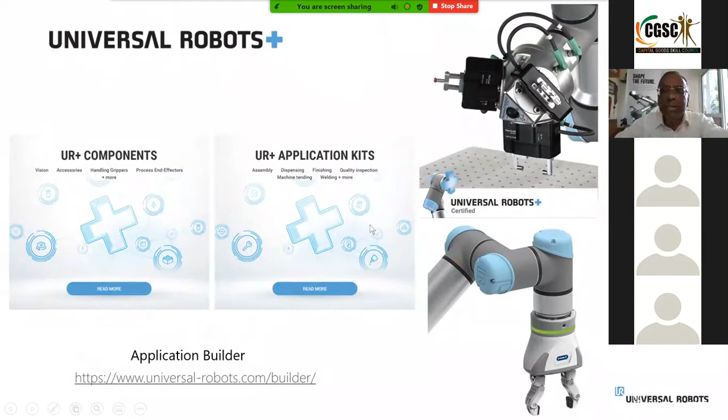We also have a program called UR Plus, which allows us to connect third-party devices to the cobot. Let's say I want to pick up a part from a CNC machine, and at the same time do gauging - check the ID and OD while I'm picking up the part. Well, we don't do that, but one of our third-party companies, part of the UR Plus program, has developed a fixture or gripper to do that. Like that, we have over 200 parts - 2D cameras, 3D cameras, jackets, pneumatic cylinders, 7th axis, etc. - available. This is something you can use today.

If this is of interest to you, go to our website, click on Universal Robots Education, and go to UR Academy - a free class with 9 modules. You'll learn how to set up the tool, create the program, how to interface, all that stuff. You can even get a certificate at the end, all free of cost. There's also simulation software available online, free of cost. So all the excuses to get started are gone - it's just the will to go ahead and learn. Go onto the education site, do the academy, download the simulation package, and get started on this. Not a single cent of investment.

This is one of the top 50 smartest companies by MIT. We're very proud to be on this list along with people like Apple, Tesla Motors, and IBM. You'll never see a KUKA here, you'll never see a Fanuc here - these are older technologies, older companies - but you will see Universal Robots.

So with that, I think, last slide. Whoever uses cobots has become a hero. Like in India, at Sandvik, this gentleman put in a cobot and immediately got an Asia Pacific award. At Mahindra, the cobot was put in for all kinds of things, and the plant manager is on television now showing how the cobot helped him in his productivity, and he's now been promoted from there.

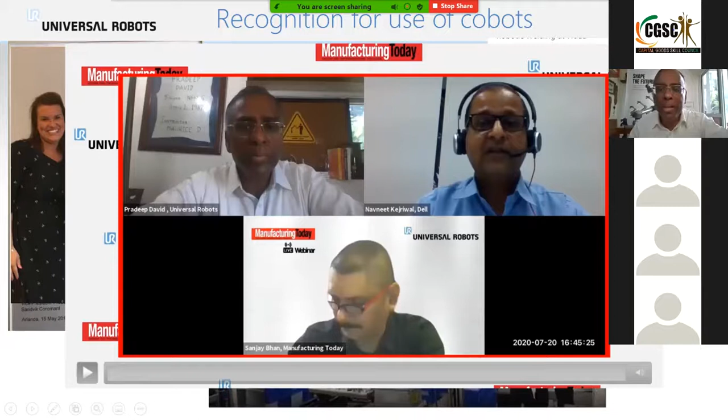Bosch had told us not to share this, but they themselves have gone to Deutsche Welle and publicly announced that they're using cobots very effectively. Here Mr. Rajendra is talking about how he has put cobots in. Mr. Kejriwal from Dell has also put a cobot in - we helped him do that - and he is now a hero in 10 different Dell plants around the world.

So if you are looking to do something constructive for your company, talk to us - we can help you be very successful.

How would you like this job? Because we're talking to Skill Council, if you had this job, how would you like it? Up there, 200 feet in the atmosphere, servicing turbine blades, right?

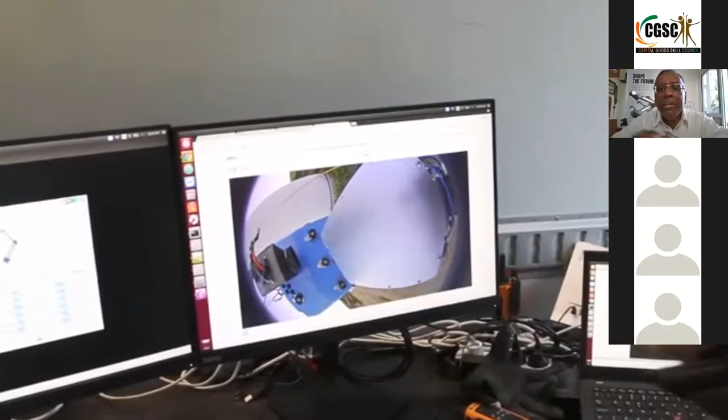Well, some intelligent engineers like you with certain skills in cobots have developed a cobot with a camera on it. It looks at which blades need fixing. It's got a welding gun on its back. If the blowhole is clogged, it will actually remove the clog because the camera feeds signals back to the remote control tower. Here is an example of ingenuity - a job which was very difficult, the engineer has taken it and used a cobot to do that dull, dirty, difficult, dangerous job. In this case, there was no social distancing, but okay.

So if there's anything you've taken back today, last slide: imagine that a cobot is part of your toolbox. It's not a fixed robot that's going to do one thing only. It's like your drill, it's like your wrench, it's like your hammer - it's part of your toolbox. You can make it do dispensing today, welding tomorrow, make omelets the next day, or do pick and place in my factory the third day. It's a tool in your toolbox.

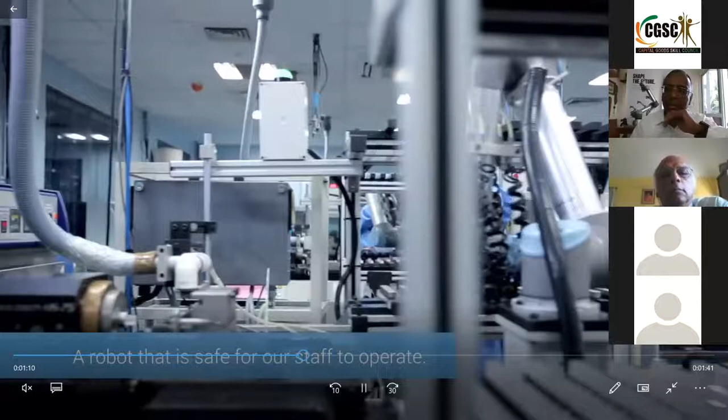So in this case, the machine is now loaded and unloaded by the collaborative robot. Remember, I'm making things that go in the eye, right? So even a small scratch and the product is unsaleable. So let's talk about the business now.

In the beginning, they were making lenses only for Aravind Eye Hospital. Today, they are selling their lenses to 150 countries. Why? Because their productivity went up, their quality went through the roof, and their price point is Indian pricing, not like Bausch & Lomb or Johnson & Johnson from the US. So 150 countries. While they had about 10, 20 people to start with, this is about 7, 8 years ago, today they've got 700 people.

So you might say, hey, I put in cobots, I'm going to lose jobs. Well, do I want to lose 10 jobs or do I want to create 700 jobs? That's the question I have for people. Jobs at the low level, if you keep protecting unskilled jobs which have very little value, businesses will be closing down in India.

India can only be competitive if, and that's why this Make in India, I wish somebody had thought about make with quality in India. We must make with such good quality that everybody around the world wants to import our products. I'm very proud to say this company used to make 150 lenses, today they make 10,000. They've created jobs.